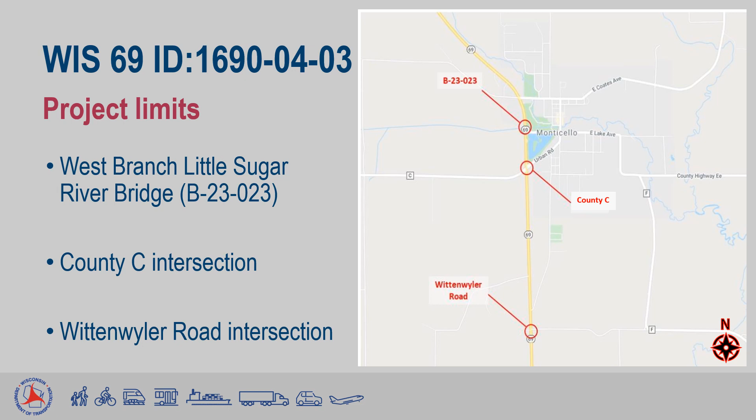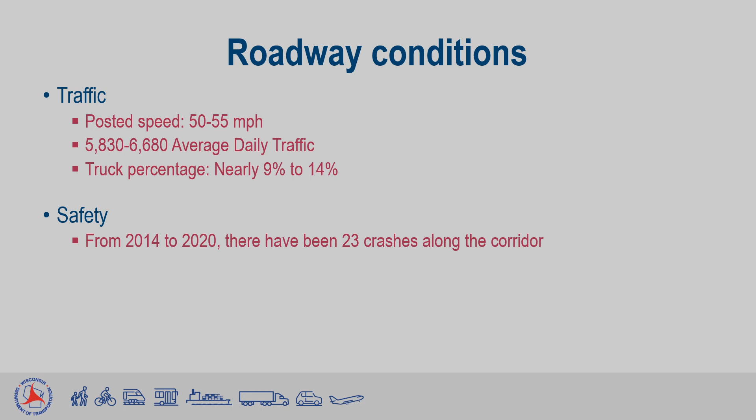The current roadway condition on Highway 69 includes posted speeds of 50 to 55 miles per hour, with average daily traffic between 5,830 and 6,680 vehicles per day. The current truck percentage ranges from nearly 9% to 14%. Safety is one of the reasons to improve these intersections. There have been 23 crashes along this section of Highway 69 since 2014.

The first location of focus on the Highway 69 project is the bridge over the west branch of Little Sugar River. Currently, the bridge includes 2 12-foot travel lanes with an 8-foot asphalt shoulder. As stated earlier, the bridge is beginning to deteriorate and has map and transverse cracking with staining. The abutments are spalling with some exposed rebar. Finally, the girders are showing some rust as well.

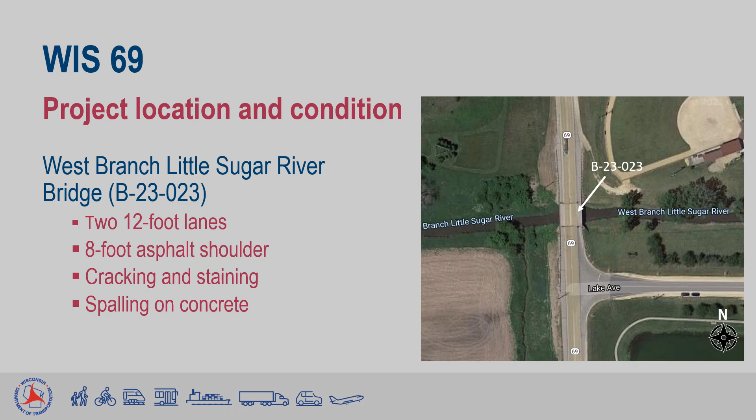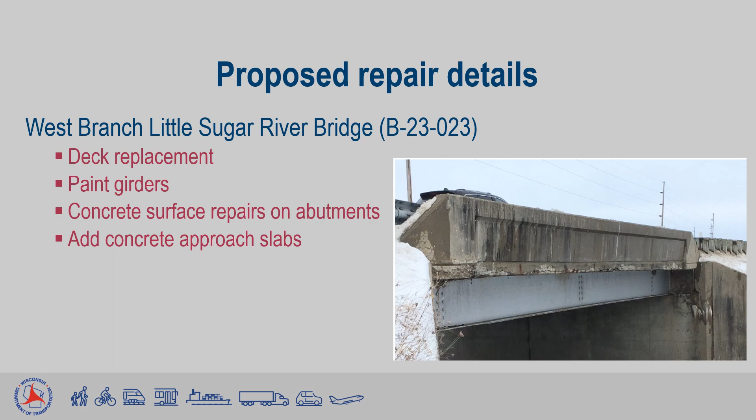The DOT is proposing to make repairs to the west branch of Little Sugar River Bridge, including replacement of the bridge deck, painting the girders, repairing the surface of the concrete, and adding concrete approach slabs.

The map to the right shows an aerial view of the Highway 69 and Wittenwyler Road intersection. Currently, there is an existing T intersection with 2 12-foot travel lanes, varying asphaltic shoulder widths, a 3-foot gravel shoulder, and an existing driveway. Since the shoulder is only 3 feet in width, it is illegal and dangerous to pass a southbound vehicle turning left.

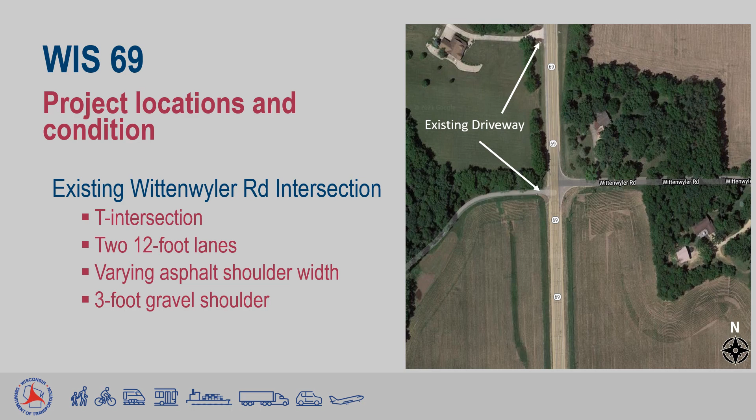For the reconstruction of the Wittenwyler intersection, the DOT is proposing a southbound left turn bypass lane. An image of what the bypass lane could look like can be seen in the image to the right. The design of the existing roadway will stay the same besides the addition of the 12-foot bypass lane. The bypass lane will help the flow of traffic on Highway 69 by eliminating the need to stop behind southbound vehicles turning left.

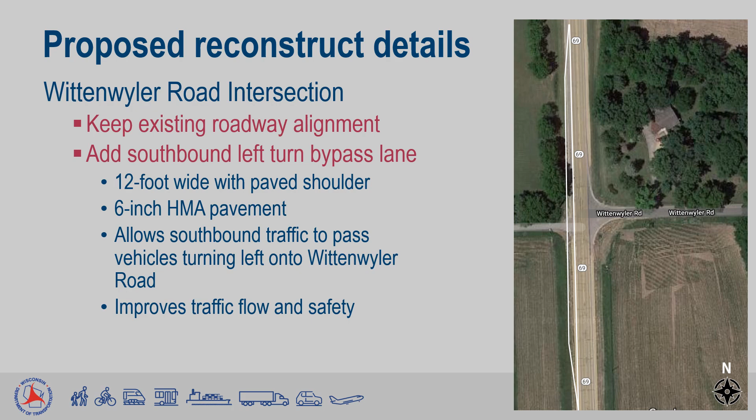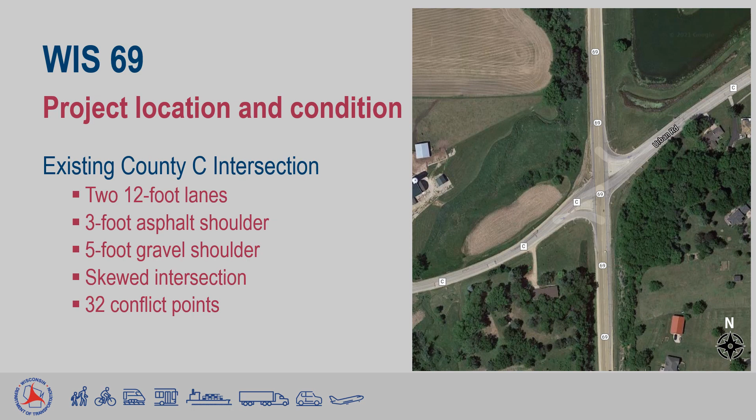The Highway 69 and County C intersection reconstruction location, seen in the aerial image to the right, has 2 existing 12-foot travel lanes with a 3-foot asphaltic shoulder and 5-foot gravel shoulder. This is a skewed intersection, which means that the roadways are not perpendicular to each other. Having a skewed intersection also means there are 32 conflict points. A conflict point is a location where vehicles' paths will cross. Skewed intersections can cause poor sight zones for motorists, which could decrease roadway safety.

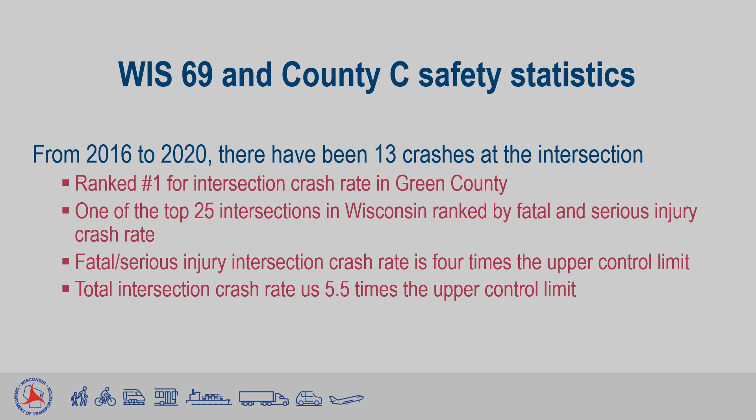For the reconstruction of the Highway 69 and County C intersection, 3 alternatives will be presented. Alternative 1 is an offset T intersection with left and right turn lanes. Alternative 2 is the closure of Urban Avenue with a cul-de-sac, and also includes left and right turn lanes on Highway 69. Alternative 3 is a single lane roundabout. In the upcoming slides, more details of the intersections and the safety improvements each alternative possesses will be explained.

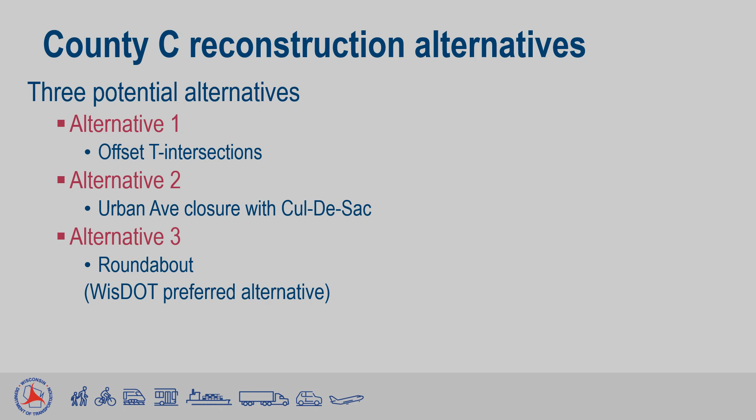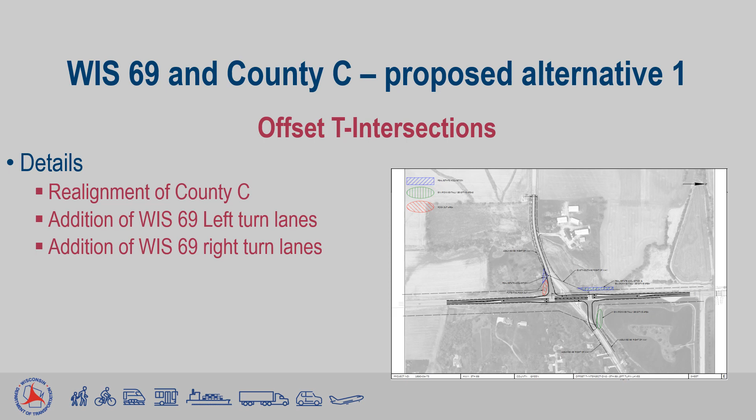The initial design of the offset T intersection can be seen in the image to the right. This design would realign County C to be almost perpendicular to Highway 69, which would improve the sight lines of vehicles entering 69 from County C. In addition to the realignment, left and right turn lanes would be added to Highway 69.

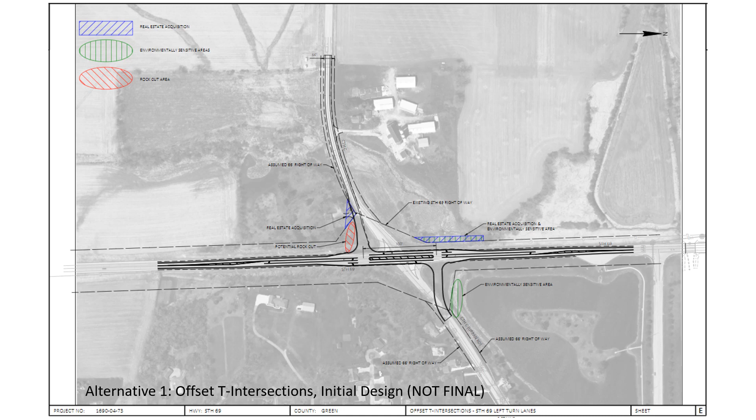Finally, even though this intersection is an improvement over the current intersection, there will still be delays for County C drivers, and the potential for high-speed crashes will not be eliminated.

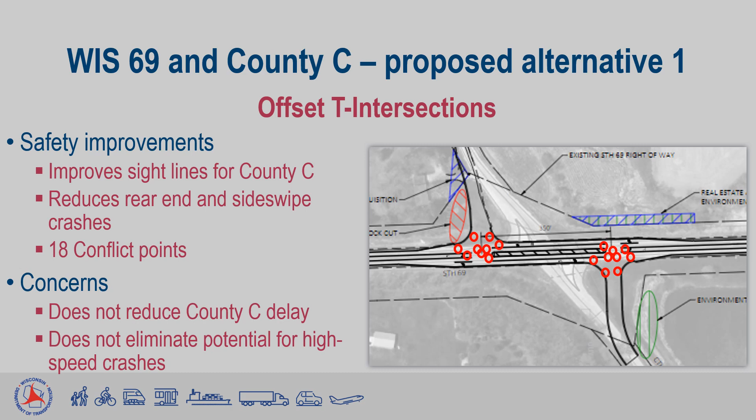For the second alternative, County C will be realigned to be perpendicular to Highway 69, and Urban Avenue will become a cul-de-sac. Both right and left turn lanes would be added for Highway 69 traffic.

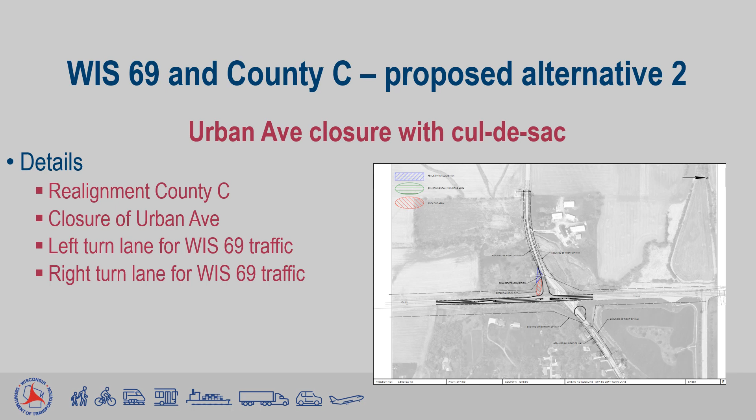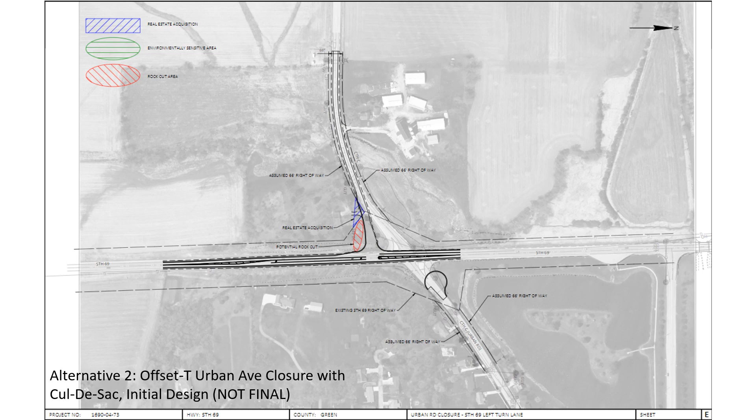Here is the initial design for the intersection with the closure of Urban Avenue with a cul-de-sac. This alternative is like Alternative 1 because of the use of an offset T intersection, but it has the benefit of decreasing the conflict points by only having a single T intersection. The posted speed limit of 50 miles per hour and the severity of crashes would remain.

Again, this alternative is an improved intersection safety-wise, but there will be delays for County C traffic, and the potential for high-speed crashes still exists.

The image seen to the right on this slide is the initial design of the roundabout at the intersection of Highway 69 and County C. The roundabout would be a single lane. Roundabouts reduce vehicle speeds and act as gap reducers.

Since the roundabout is a single lane, it will help to simplify the driver's decision-making process, as the roundabout only needs to be clear to the left for a vehicle to enter. The roundabout is a significant operational improvement and will reduce delay on County C.

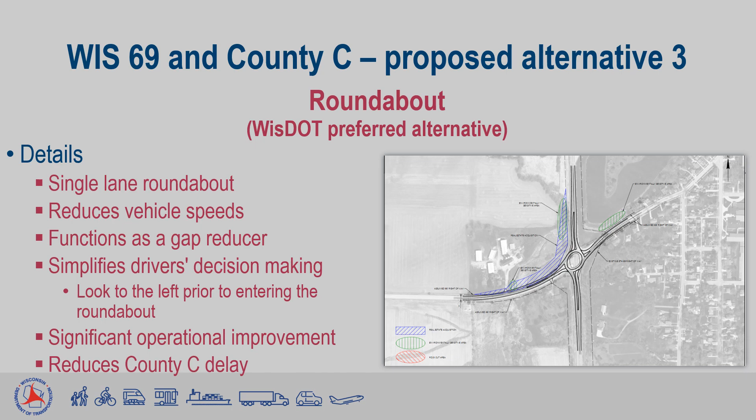Here is a zoomed-in image of the initial design for the roundabout. The combination of speed reduction and minimized conflict points makes the roundabout the safest alternative for this project.

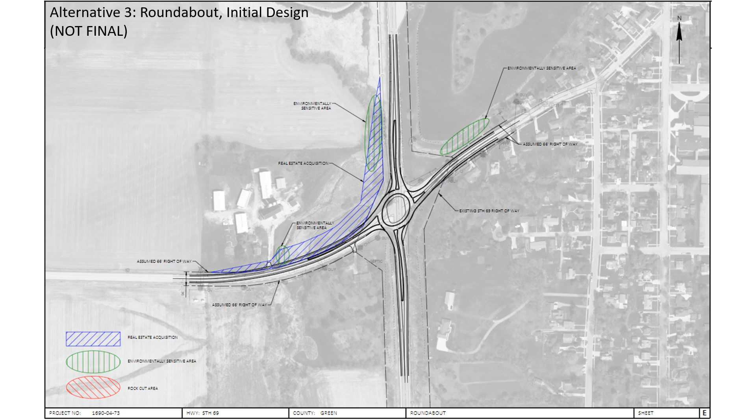Roundabouts improve safety by reducing vehicle speed and eliminating crossing traffic. The 8 conflict points of a roundabout include only merging and diverging traffic.

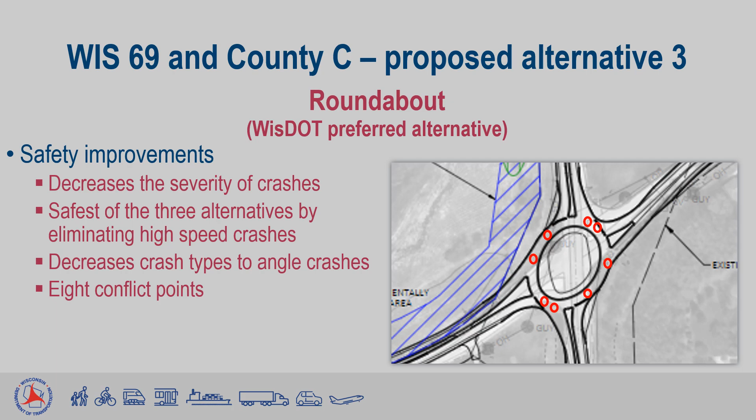Due to the complexity of the Highway 69 and County C intersection and the diverse range of impacts each alternative could have on community members, we are requesting public comment about each alternative.

To comment on the project, follow the steps on this slide to the project website. On the site, you can complete the PDF comment form or share input through an online survey. Both the survey and the comment form will be sent to the DOT to help determine the best alternative for the community, motorists, and the environment. Filling out the online survey should take no longer than 3 minutes.

The current traffic management plan is to keep Highway 69 open to traffic throughout the construction. Since the project is still in the design phase, that may or may not change depending on the constructability of the final design. For the repairs on the bridge over the West Branch of Little Sugar River, traffic signals will be used to direct traffic over the bridge.

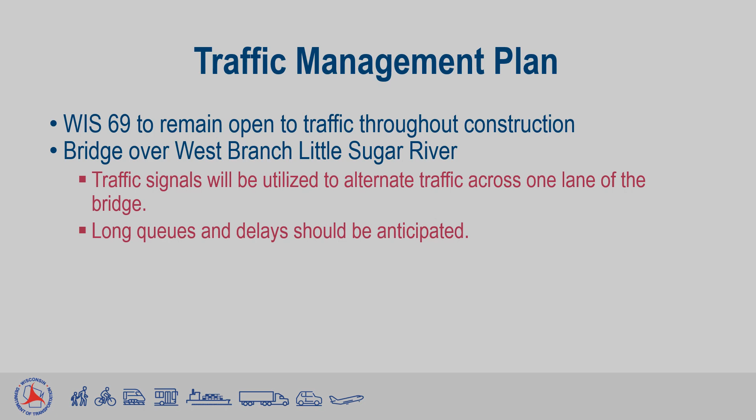Traffic signals will be used to direct traffic over the bridge. This method may cause traffic queuing on each side of the bridge.

Real estate acquisition is planned for this project. Properties near the Wittenweiler Road and County C intersections will most likely be affected by the real estate acquisition. Impacted property owners will be contacted in the future once project details are finalized.

Public comment will be accepted through December 13th, 2021. The final intersection type will be selected by February 2022. Property owners will be contacted between 2023 to 2025 to discuss real estate. The project is currently scheduled to be out for bid on November 11, 2025, with construction beginning in 2026.

More details of the project schedule can be found on the website where this presentation is located.